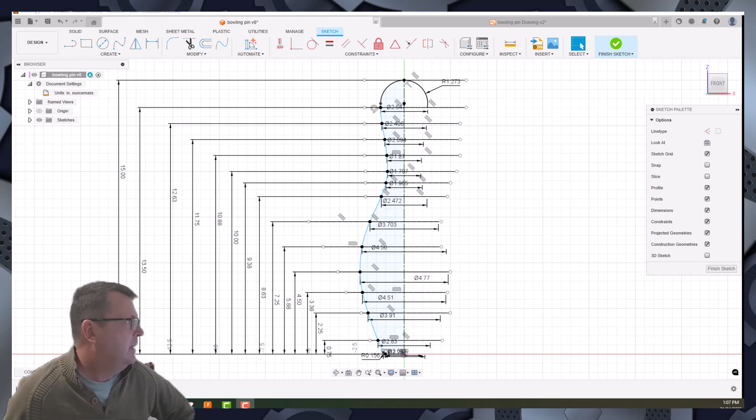So on the screen here you can see my sketch. If I finish my sketch, you'll be able to see there's the bowling pin. In the sketch we've got two main elements we're looking at. If I hold it on that view, you can see all these dashed horizontal lines, defining the various heights within the sketch. And we've got a different type of dashed center line running down the center of the pin, called a center line, which helps us dimension the diameters going around the middle.

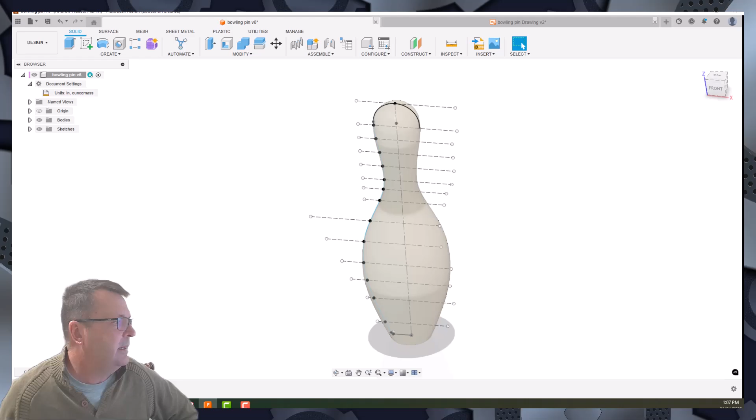So our point that we have, if I go back into our sketch here, we're going to zoom in. Here we've got a line going across. If I highlight that with blue and put my mouse on it, that's defining the height of a point, this point just there, that little white dot. So that dot is 0.75 of an inch high, but that's also a 2.83 diameter.

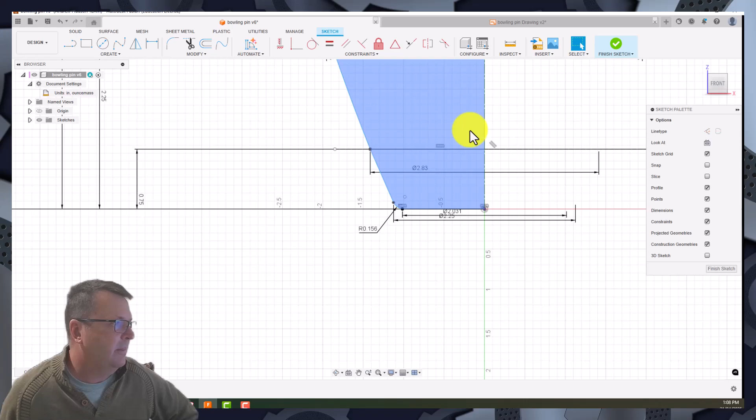Because you reference from the center line, it works out the diameter of the full revolve that you're going to do. Otherwise you'd halve that to get the radius if you need to do that.

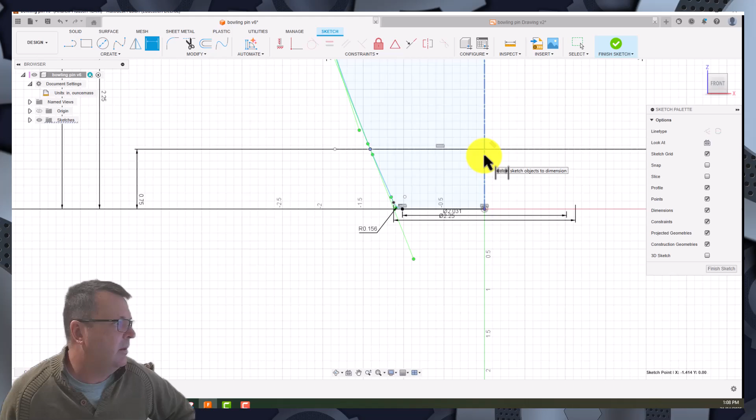So if I delete that off just to show you what I mean, if you go to the dimension tool and click on the dot, the point that we've made, and the center line, you can see it highlights in blue, and it automatically puts the mirrored part of that where it needs to go out the other side. So that's what's called a dimension around that center point.

So you need to find two dimensions for each one of those little points. One is the height, one is the diameter that you're going to be doing.

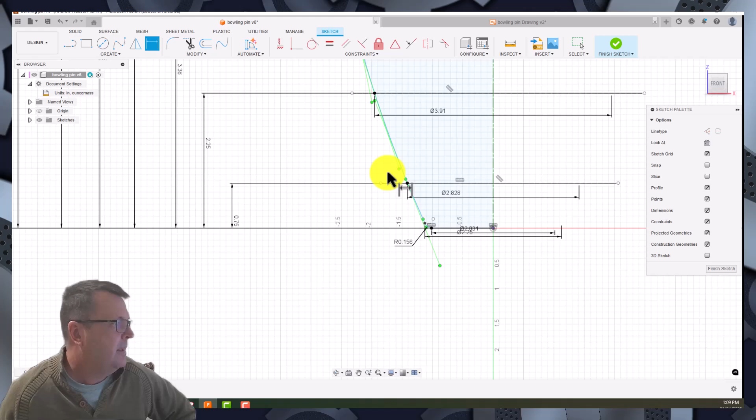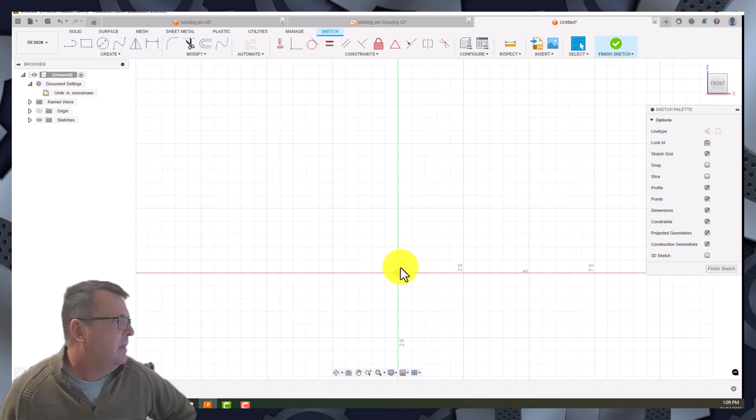So the easiest way to do that is if we grab a new design, and I'm just going to show you how to do one. You're going to work from this origin point at the base. Go to document settings, make sure the units over here are in inches, and then you'll be able to copy the same dimensions that I give you. Just go OK. All right, so what I'm going to do is get the line tool.

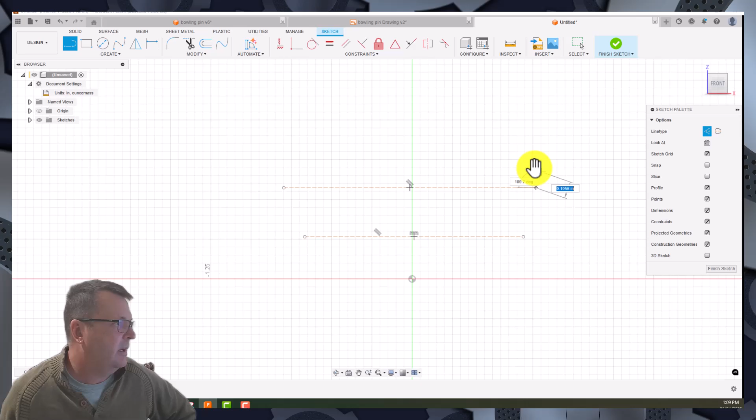When this palette comes up over here, you want to make these a construction line. We don't want them to actually be part of what we are drawing, just to reference. So go construction line, and you literally draw a line there, make sure it's horizontal, then hit the little button there and go OK. If you can't reach that enter key, right click on your drawing and go OK that way. So you're putting lines like that.

And then you're going to use the dimension tool to define that height to that dot. Then copy the dimension, and put the next one. It'll be from that line to our origin point, then do the next one, and so on, repeating that process for all the heights we have in the pin.

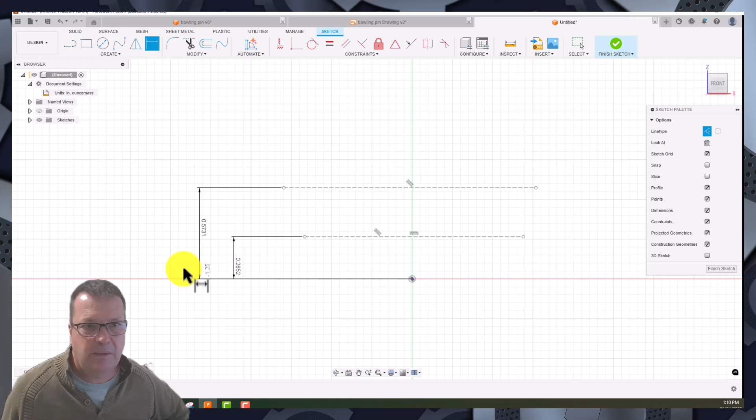The next part is, if you can't see the dimension tool, it'll probably be down here. So you can use the sketch dimension, or the letter D on the keyboard, and we'll bring that up. Just up from that, you can see we've got a thing called point.

Now the points are what you're going to then draw on that line. So you're going to put a point on this line, then go over to another point that's going to be on that line, and so on and so forth, all the way up. That is what you're going to reference from.

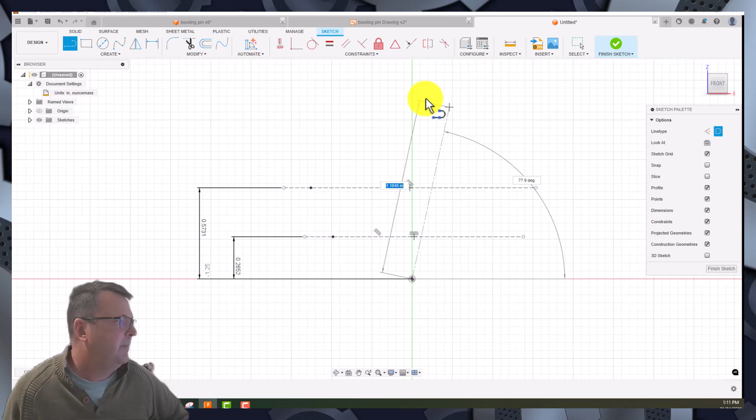Now, at the moment, we don't have a center line drawn. So you need to go to our line tool, back to our sketch palette, and you'll see that the next one across from the construction is the center line. Select that, and draw a line from the bottom all the way up, to the height that you need for your pin.

I'm just going to do that so you can see. You can see that the dashes are different in the center line to the construction lines. So we're going to right click and go OK. Go to our dimension tool, and now when we dimension, we can click on that dot, then click on the blue line, our center line, and it will give us a diameter of what those points need to be. Then match those diameters up to the drawing that you've been provided with.

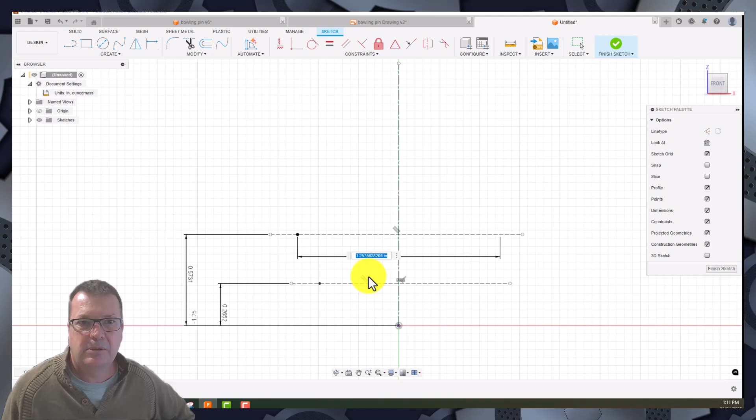Hit OK and repeat that process. Make sure you get all your diameters there. Oops, I deleted that, let's make this one 1.

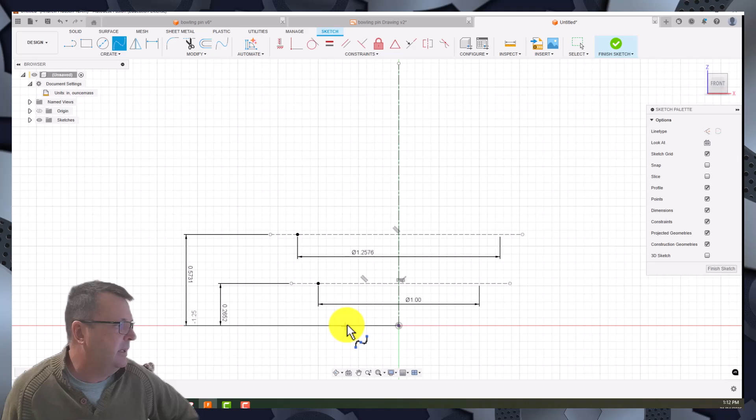Once you've got all your points drawn all the way up on each of those construction lines, use the spline tool here, the fit point spline, and click from that baseline, then click each of those points until you reach the top of your pin. That'll create a nice curve there.

The top part of the pin is actually a circle. It asks for a radius there. So if you draw the circle like that and dimension it with that tool, it will come off as a diameter.

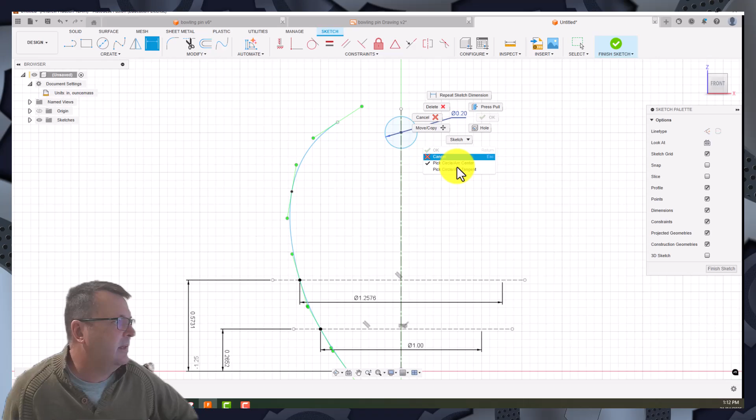Once it's in diameter like that, you can right click it and... cancel out of the dimension tool, then right click on it, you can go toggle radius. It gives you the 0.10. Once you've got it in the radius, enter that as per the drawing.

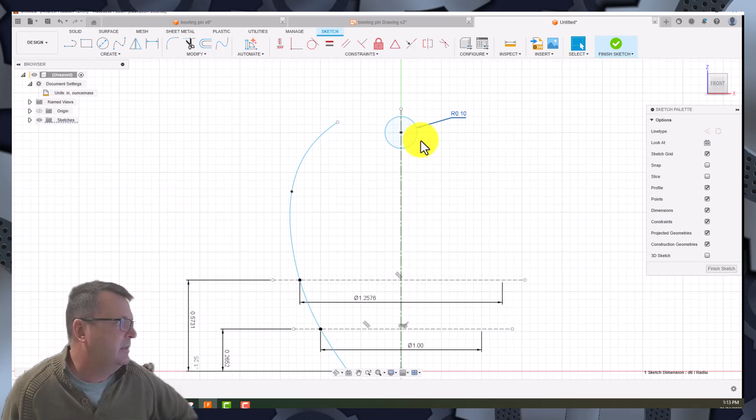The last point is going to be a tangent, which is this thing here. You're going to tangent that line to this line. Let me see if I can bring this one across. If we have that line like that, we should be able to go tangent. We want to tangent this to that.

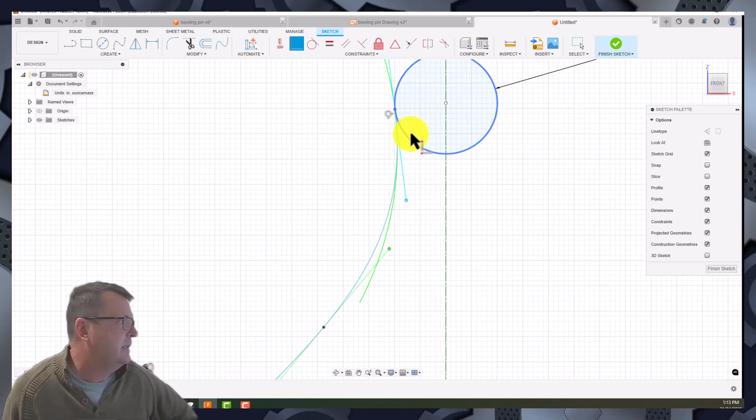If we grab that, we should be able to get that dot that's there. The dot's actually tangent to that. What we're going to do, the endpoint, is fix that to that, and there we go. There's our tangent, our line is merging into that.

If I click off this line here, our spline is tangent to this circle here. That's how you get the top of the bowling pin. Then you're going to delete this part of the circle out so the line just goes up around the top of the pin.

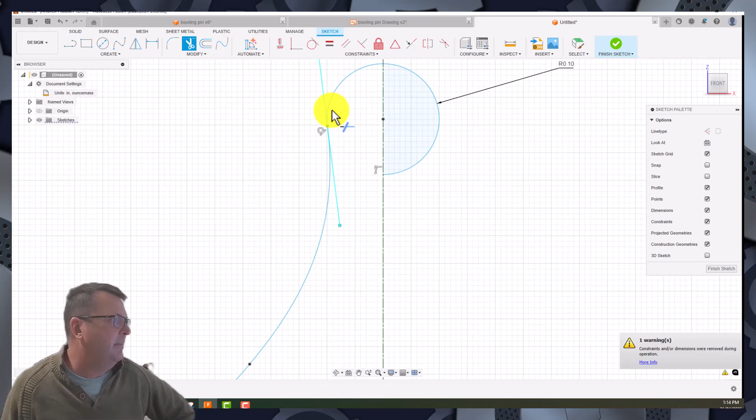That's the top, and there's going to be a small radius down the bottom here, which you're going to use a three-point arc for. You're going to create a point there and a point there, and then one out the side. So the 3-point arc is 1 point, 2 points, and then you define the radius.

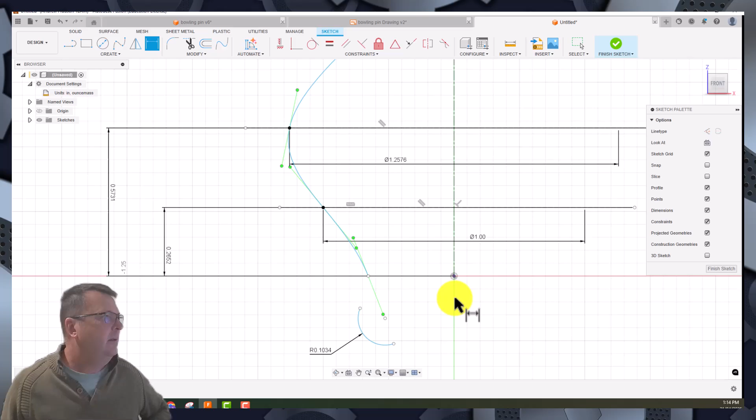3 points like that, and then dimension that as per the drawing. Whatever it is in the drawing, dimension that afterwards. I'll probably need to help you with that bit there.

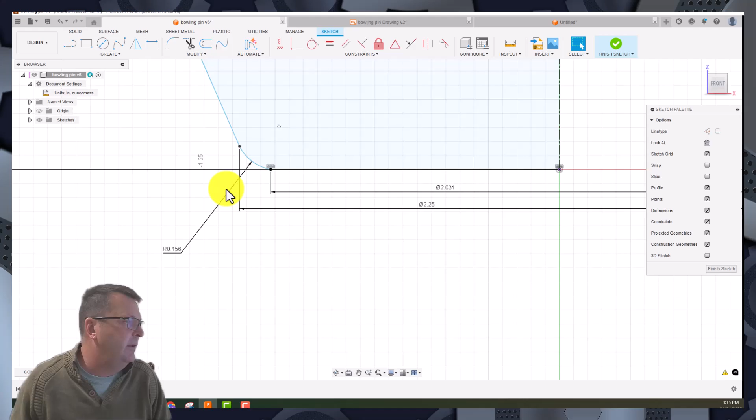If we go back to the bowling pin and look at that, you can see the 3-point arc down the bottom there. It might be helpful for you to draw in this line here first and then define the diameter of that. Once you've got that fixed point, that becomes your first point, the second one becomes your second point, then click out there and define that radius. That's how you do that.

If we look at the top of the bowling pin here, if I scroll up, you can see my circle there. It goes all the way around. It's got a radius of 1.273 inches. You can see it doesn't quite line up with our lower point.

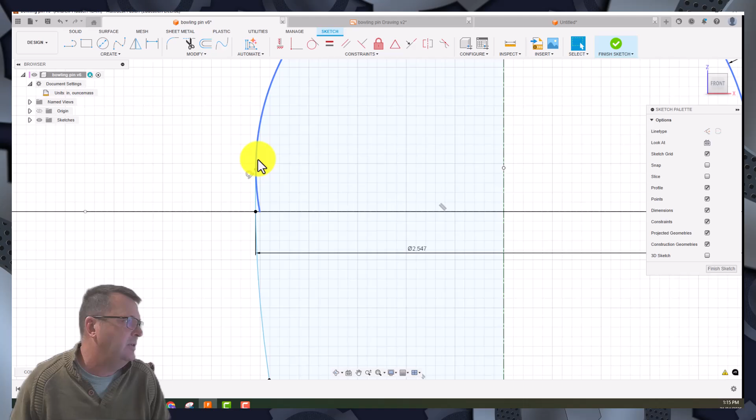That's the end of the spline, using that tangent tool to tangent into that spline. So don't worry if they don't line up like that, that's okay. Place all those on there, and that's going to be the end height of the pin, which is at 15 inches.

You can see I've deleted off those. Once you've got your drawing, you can see I've only got half the pin there, I haven't got a full pin. Half means it's shaded, so there's only one half that's shaded.

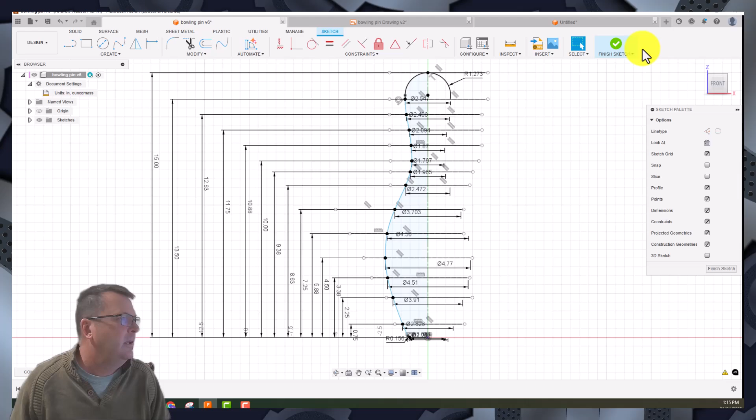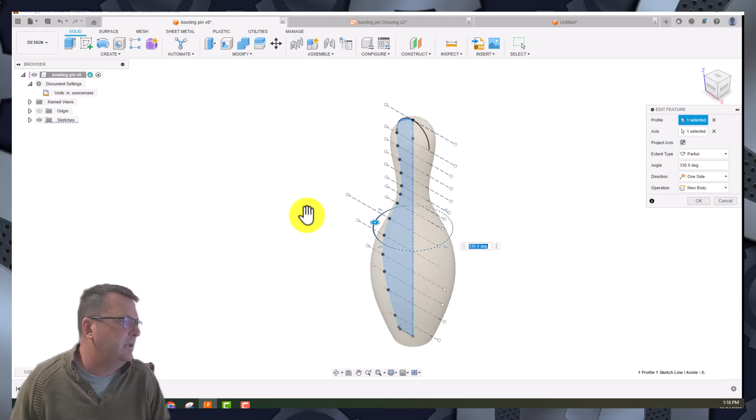You basically go finish sketch, and you're going to create what's called a revolve, which is this one here. Essentially what a revolve does, if I edit that and show you, it takes that shape we've drawn and revolves it around in a full circle. It takes that profile and shifts it 360 degrees, and it makes a full unit. And then there's your pin.

So have a go at that. You're going to be supplied with these drawings here.

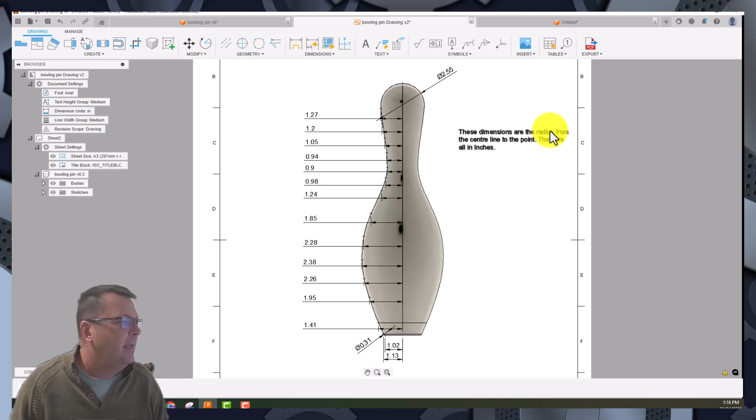This first page of the drawings is all the heights, so that's where you're going to draw the lines. The second page is the diameter for the points that are there. Don't forget these dimensions here are radiuses, so you have to double that to get to diameter. And they're all in inches. So you'll get those two drawings there.

Then you're going to have a crack at doing the bowling pin. Don't forget, when you start a drawing, if I get out a finish sketch out of this, you need to go to the sketch tool here, create sketch, select a work plane. For this, I recommend we do it on the XZ plane, which is that one there.

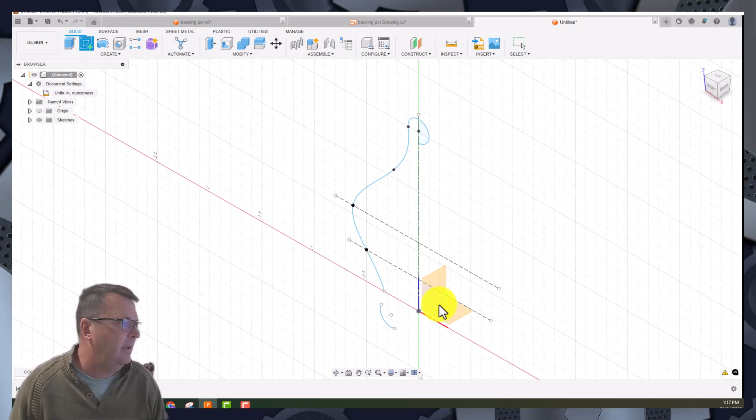Click on that and then draw your sketch. All right, have a go at that, see how you get on.